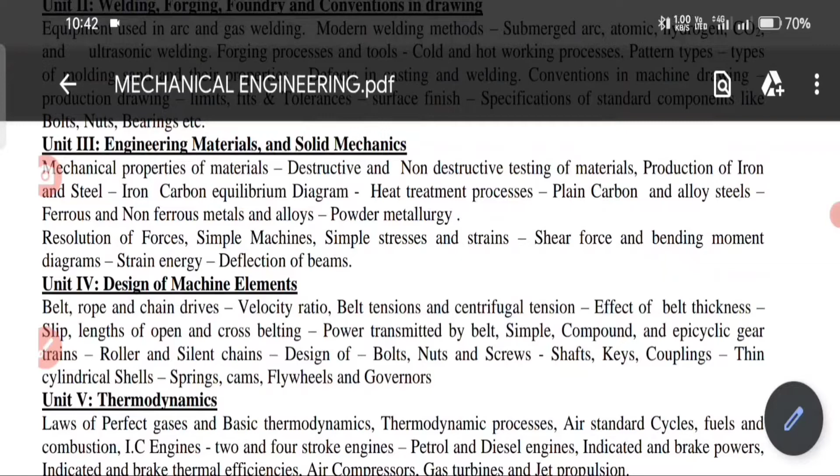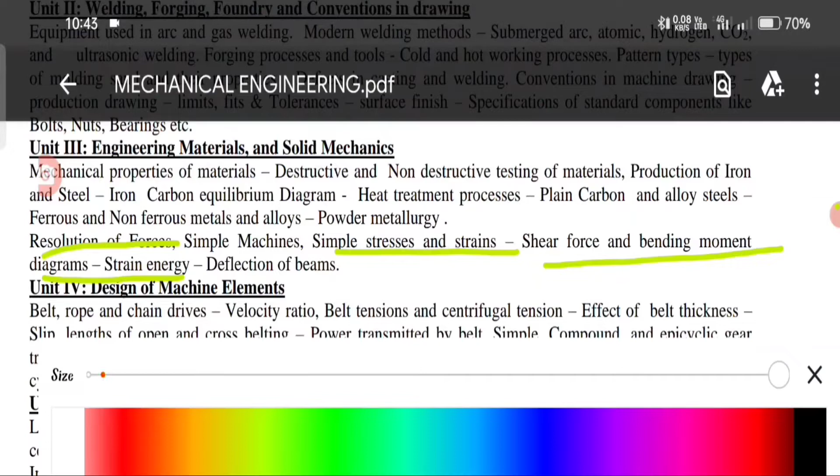మనం కూడా సిలబస్ చూద్దాం, ఏ టాపిక్స్ కవర్ అయ్యానో చెప్తాను. రెజల్యూషన్ ఆఫ్ ఫోర్సెస్, సింపుల్ స్ట్రెస్సెస్ అండ్ స్ట్రెయిన్స్, షియర్ ఫోర్స్ అండ్ బెండింగ్ మూమెంట్ డయాగ్రామ్స్, స్ట్రెయిన్ ఎనర్జీ వరకు మనం అన్నీ కవర్ చేసాం. డిఫ్లెక్షన్ ఆఫ్ బీమ్స్ అనేది నెక్స్ట్ క్లాస్లో చూస్తాం, అలాగే సింపుల్ మిషన్స్ కూడా కవర్ చేస్తాం. సో ఆల్మోస్ట్ 80% సిలబస్ పార్ట్ 1 వీడియోలో కవర్ చేసాం. ఎవరైనా చూడనట్లయితే మెకానికల్ స్టూడెంట్స్ ఫస్ట్ వీడియో డిస్క్రిప్షన్లో లింక్ ఉంది, వెళ్ళి చూడండి.

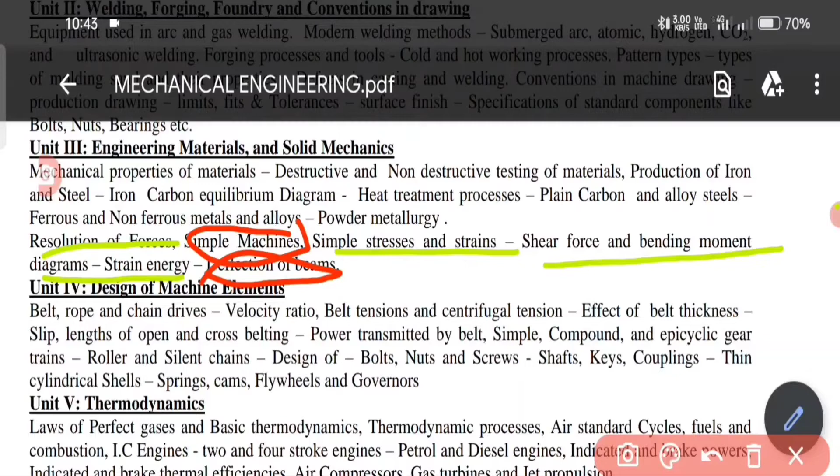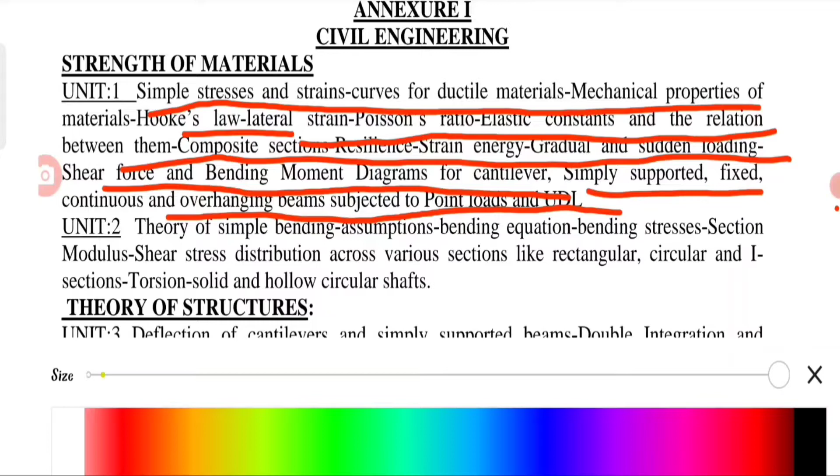ఓకే, సివిల్ ఇంజనీరింగ్కి సంబంధించి ఈసెట్ సిలబస్ స్ట్రెంగ్త్ ఆఫ్ మెటీరియల్స్ చూద్దాం. మనము ఫస్ట్ వీడియోలో ఏదైతే కవర్ చేస్తున్నామో ఇప్పుడు చూద్దాం: సింపుల్ స్ట్రెస్సెస్ అండ్ స్ట్రెయిన్స్, కర్వ్స్ ఫర్ డక్టైల్ మెటీరియల్స్, మెకానికల్ ప్రాపర్టీస్ ఆఫ్ మెటీరియల్స్, హుక్స్ లా, lateral strain, Poisson's ratio, elastic constants and the relation between them, composite sections, resilience, strain energy, gradual and sudden loading, shear force and bending moment diagrams for cantilever, simply supported, fixed, continuous overhanging beams, subject to point load and UDL. సో ఇవన్నీ కంప్లీట్ అయిపోయాయి, సిలబస్ అంతా కంప్లీట్ అయిపోయింది. సో ఇది యూనిట్ 1 కంప్లీటెడ్.

నెక్స్ట్ ఈ వీడియోలో రిమైనింగ్ టాపిక్స్ ఏవైతే ఉన్నాయో అవి ఇప్పుడు చెప్తాం. థియరీ ఆఫ్ సింపుల్ బెండింగ్, అజంప్షన్స్, బెండింగ్ ఈక్వేషన్, బెండింగ్ స్ట్రెసెస్, సెక్షన్ మాడ్యులస్, షియర్ స్ట్రెస్ డిస్ట్రిబ్యూషన్ అక్రాస్ ది వేరియస్ సెక్షన్స్, రెక్టాంగులర్, సర్క్యులర్స్ అండ్ సాలిడ్ అండ్ హాలో సర్క్యులర్ షాఫ్ట్స్.

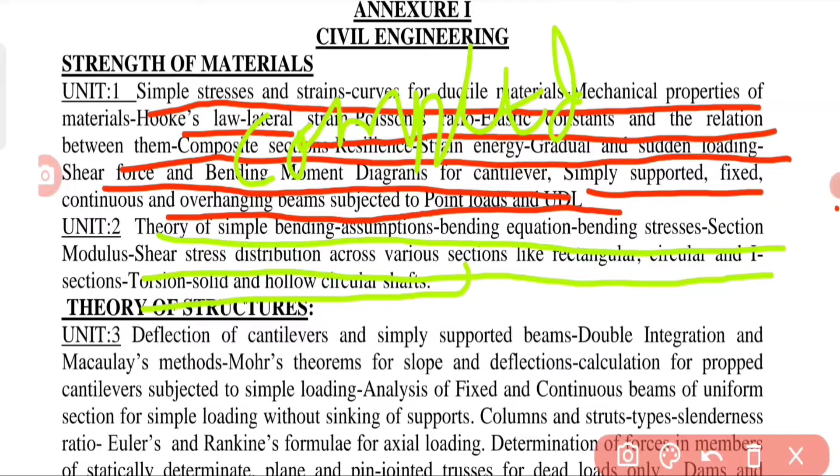సో ఈ వీడియోలో మనం ఇవన్నీ కవర్ చేస్తాం. ఆ తర్వాత వచ్చే నెక్స్ట్ వీడియోలో థియరీ ఆఫ్ స్ట్రక్చర్స్ కంప్లీట్ సిలబస్ వస్తుంది. సో ఇప్పుడు యూనిట్ 2కి సంబంధించి సిలబస్ స్టార్ట్ చేద్దాం. ఈ వీడియో రాకేష్ సార్ కంప్లీట్ చేస్తారు. థియరీ ఆఫ్ సింపుల్ బెండింగ్ అనే టాపిక్ని చూద్దాం.

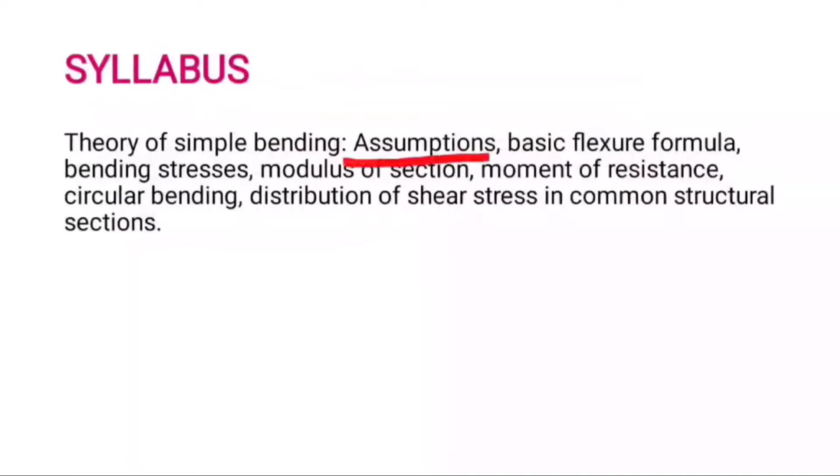ఈరోజు క్లాస్లో మనం డిస్కస్ చేసుకునే సిలబస్ ఏంటంటే అజంప్షన్స్, బేసిక్ ఫ్లెక్చర్ ఫార్ములా, బెండింగ్ స్ట్రెస్సెస్, మాడ్యులస్ ఆఫ్ సెక్షన్, మొమెంట్ ఆఫ్ రెసిస్టెన్స్, సర్క్యులర్ బెండింగ్, డిస్ట్రిబ్యూషన్ ఆఫ్ షియర్ స్ట్రెస్ ఇన్ కామన్ స్ట్రక్చరల్ సెక్షన్స్.

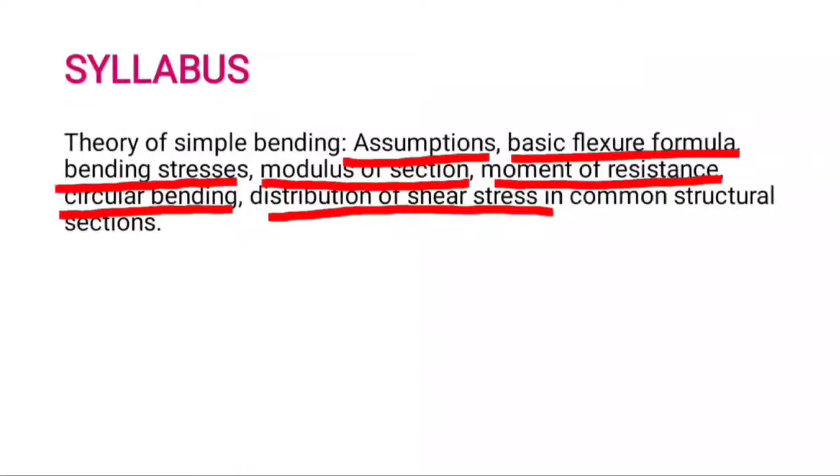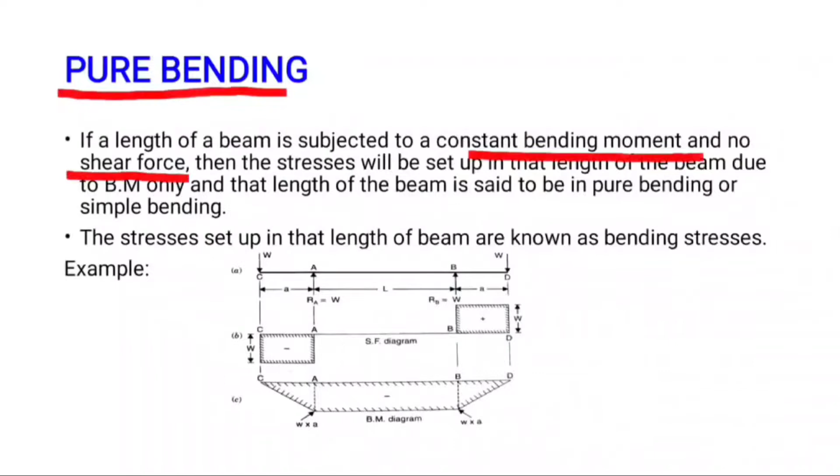అజంప్షన్స్కి వెళ్ళే ముందు ప్యూర్ బెండింగ్ అంటే ఏంటో తెలుసుకుందాం. If a length of beam is subjected to a constant bending moment and no shear force, that is shear force is 0, bending moment is constant, then the stresses will be set up in that length of beam due to bending moment only. ఆ పర్టికులర్ లెంత్ ఆఫ్ బీమ్లో మనకి స్ట్రెస్సెస్ అనేటివి బెండింగ్ మూమెంట్ వల్ల మాత్రమే డెవలప్ అవుతాయి, షియర్ ఫోర్స్ వల్ల డెవలప్ కావు.

ఎందుకంటే ఆ పర్టికులర్ లెంత్ ఆఫ్ బీమ్లో షియర్ ఫోర్స్ అనేది 0. That length of beam is said to be in pure bending or simple bending. స్ట్రెసెస్ అనేటివి బెండింగ్ మూమెంట్ వల్ల మాత్రమే డెవలప్ అవుతున్నాయి కాబట్టి వాటిని బెండింగ్ స్ట్రెసెస్ అని అంటున్నాం. ప్యూర్ బెండింగ్కి ఒక ఎగ్జాంపుల్ తీసుకుందాం, ఒక ఓవర్ హ్యాంగింగ్ బీమ్ తీసుకుందాం. ఓవర్ హ్యాంగింగ్ పార్ట్లో ఎడ్జెస్లో W అనే లోడ్ యాక్ట్ అవుతుంది బోత్ సైడ్స్. ఆ లోడింగ్ కండిషన్కి షియర్ ఫోర్స్ డయాగ్రామ్ అండ్ బెండింగ్ మూమెంట్ డయాగ్రామ్ ప్లాట్ చేసినట్లయితే, in the portion AB the shear force is 0 and for the same loading condition the bending moment is constant. So we say that the portion AB is under pure bending condition or simple bending condition.

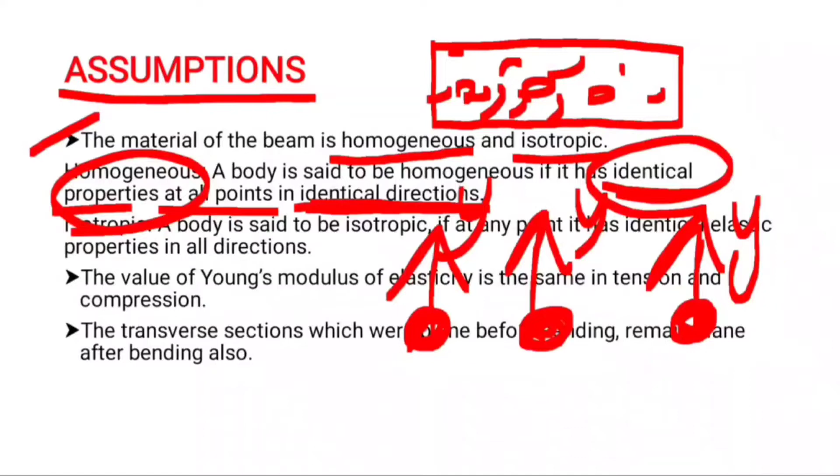When do we call it isotropic? This is a body, it has lots of points. At any point we consider, the elastic properties in all directions, that is x direction, y direction and z direction - if the elastic properties are the same, then the body is said to be isotropic.

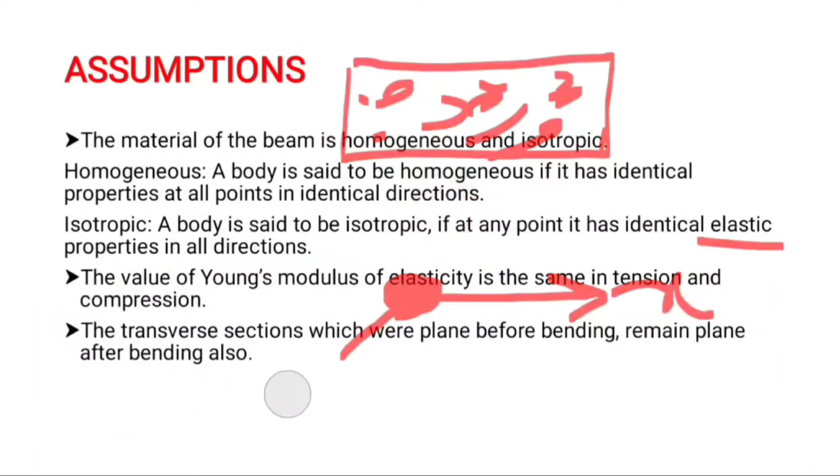The next assumption is the value of Young's modulus of elasticity is same in tension and in compression, that is E tension, Young's modulus of elasticity in tension, is equal to Young's modulus of elasticity in compression.

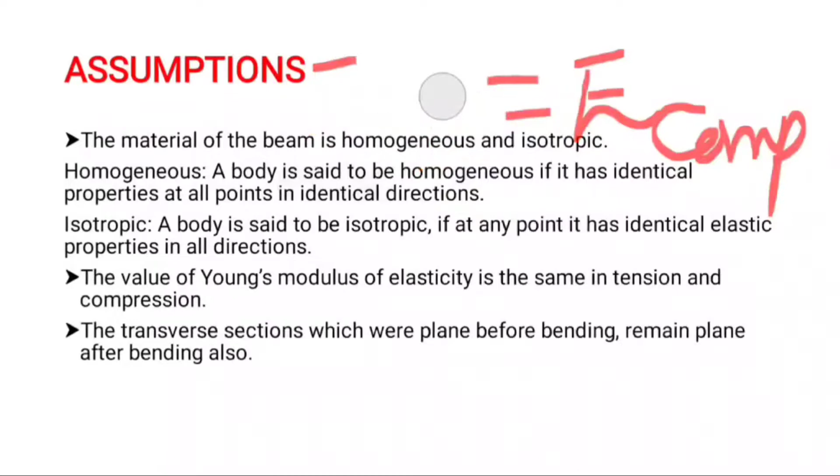The transverse section which were plane before bending remain plane after bending. For the third assumption, for better understanding, we draw a figure. This is the beam before bending condition. This is the transverse section, named as neutral axis. That neutral axis is plane before bending, and remains plane after bending also.

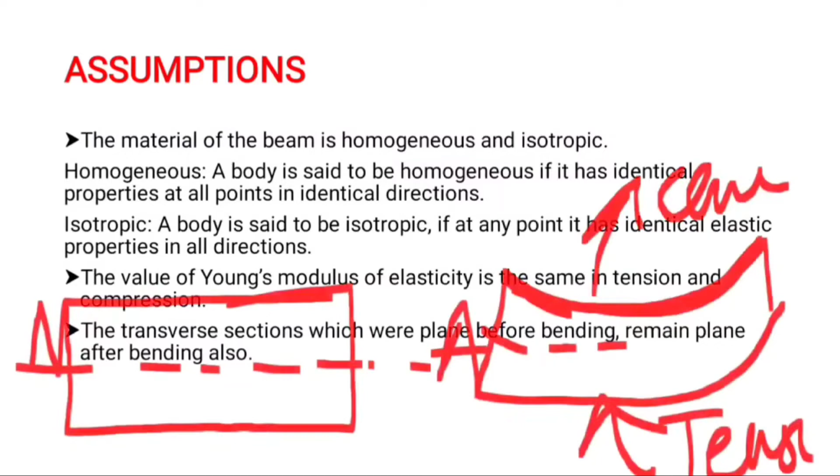This is bending, after bending condition. After bending, the topmost fibers undergo compression, and the bottommost fibers undergo tension, but the neutral axis remains in plane condition only.

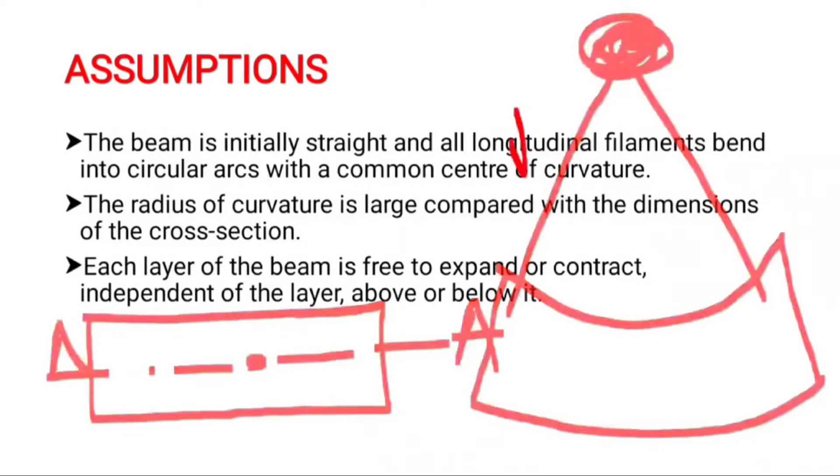The next assumption is the beam is initially straight. This is the neutral axis. All longitudinal filaments bend into circular arcs with a common center of curvature. This is the common center of curvature. The radius will be r. We consider the radius from the neutral axis.

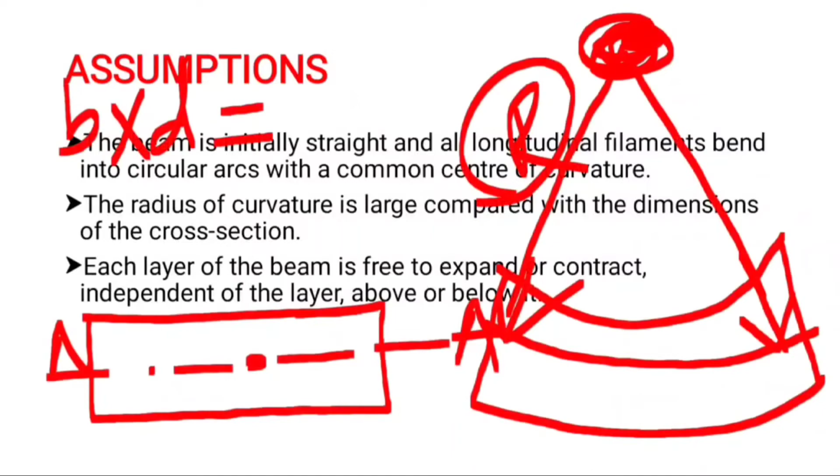The next assumption is the radius of curvature is large compared with the dimensions of the cross section. The beam dimensions, let's say B into D, is equal to 300 mm by 200 mm, but the radius will be 10 meters. Comparing the radius with the dimensions of the beam, the radius is very large.

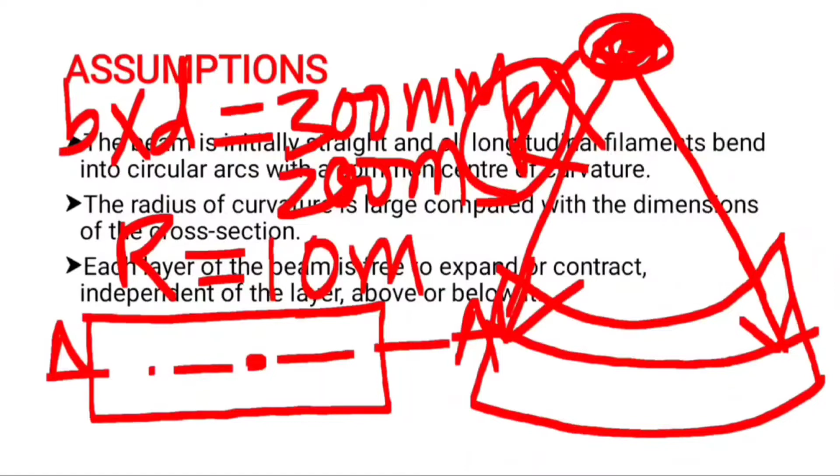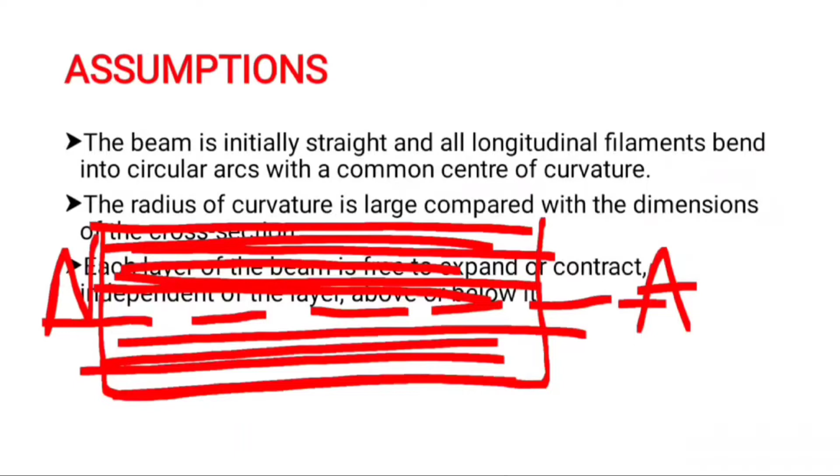That is the assumption made in bending theory. The last assumption is each layer of the beam is free to expand or contract independent of the layer above or below it. Let's say this is a beam, this is a transverse section, that is neutral axis. The layers above the neutral axis and the layers below the neutral axis are free to expand or contract. They do not depend on the other layers - they are independent of the layer above or below it. This is the final assumption made in bending theory.

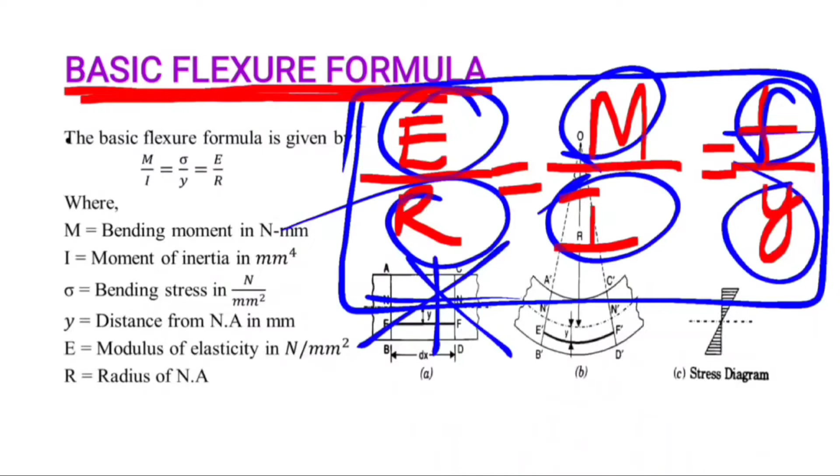Based on this phrase, we remember the formula: Elizabeth Rani, may I follow you. Here the term M is bending moment, I is moment of inertia, sigma is bending stress, y is distance from the neutral axis. We can observe here, this is the strip, this is the neutral axis. From the neutral axis we measure the distance, that is y. E is modulus of elasticity in Newton per mm square, R is radius, this is radius.

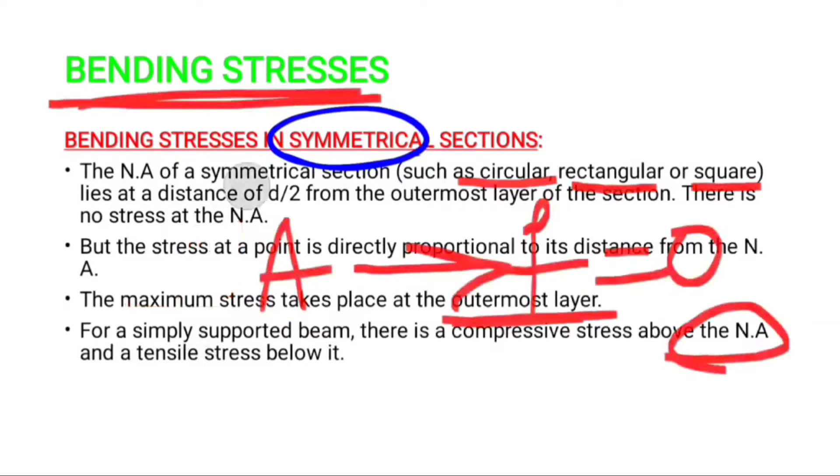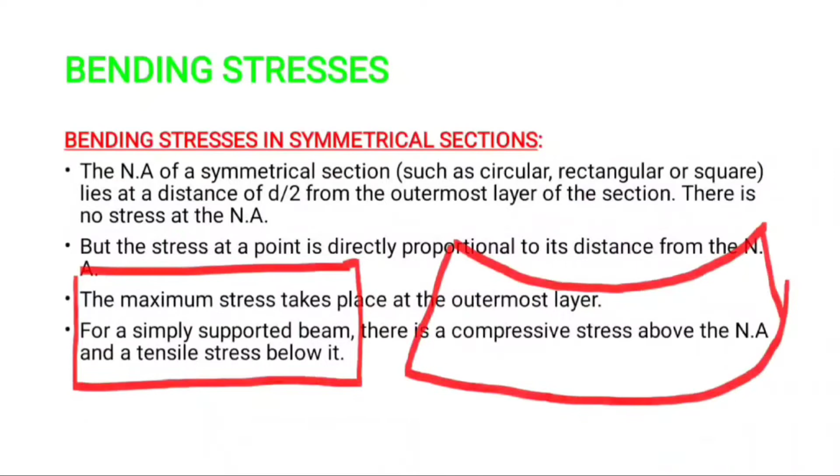For a simply supported beam, there is a compressive stress above the neutral axis and a tensile stress below it. Why? Because we see the bending phenomenon - this is before bending, this is after bending. The topmost fibers undergo compression, the bottommost fibers undergo tension. That's why the compressive stresses are developed at the top and tensile stresses are developed at the bottom.

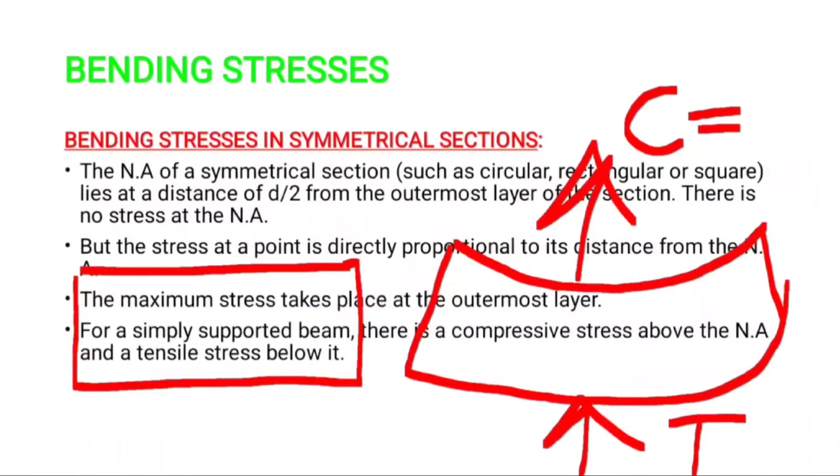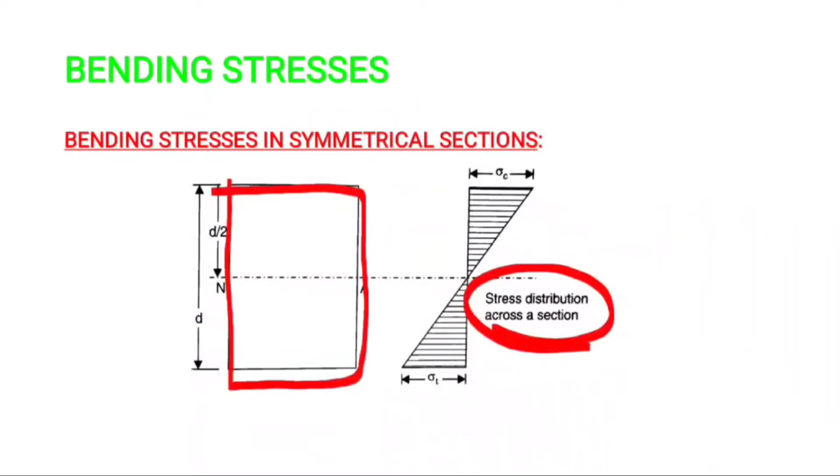Let's see, this is a simply supported beam. We draw the stress distribution. This is compression, this is tension.

Y max అనేది సిమెట్రికల్ సెక్షన్స్లో సేమ్గా ఉంటుంది, బట్ ఇన్ అన్సిమెట్రికల్ సెక్షన్స్ y max అనేది చేంజ్ అవుతుంది, నాట్ కాన్స్టెంట్. For finding the bending stresses in the beam, bigger value of y is used, that means y max.

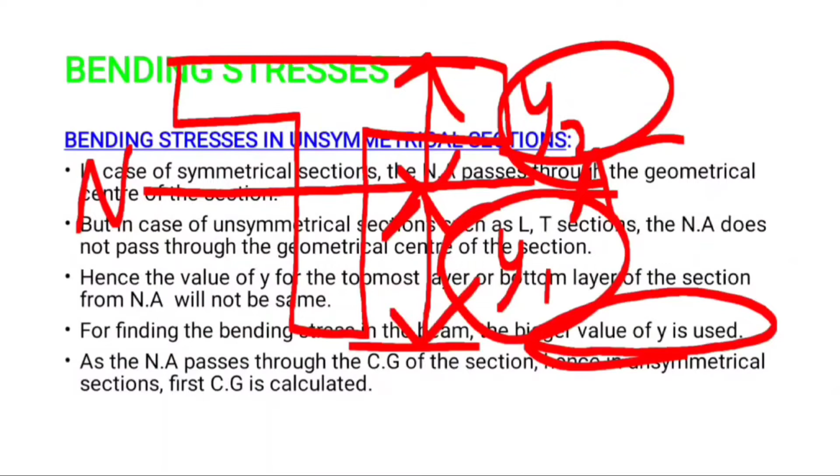We calculate, let's say this is a T section, this is neutral axis. From this y1, this is y2, right? Among these two, y1 or y2, whichever is maximum we consider for finding the bending stresses. y1 y2 కనుక్కుంటాం, ఆ రెండిట్లో ఏది మ్యాక్సిమం ఉంటే ఆ వాల్యూని యూజ్ చేసి బెండింగ్ స్ట్రెస్సెస్ అనేటివి కనుక్కుంటాం అన్సిమెట్రికల్ సెక్షన్స్లో.

అదే సిమెట్రికల్ సెక్షన్స్లో మనకు ఆ ప్రాబ్లం ఏమి ఉండదు, మనం కన్సిడర్ చేసేది y మ్యాక్సిమం, ఎందుకంటే న్యూట్రల్ యాక్సిస్ అనేది d/2 డిస్టెన్స్లో పాస్ అవుతుంది కాబట్టి ఎలాంటి ప్రాబ్లం ఉండదు. d/2 అబౌవ్, d/2 బిలో - d/2 అనేది మనకు y max వాల్యూ వస్తుంది.

As the neutral axis passes through the center of gravity of the section, hence in unsymmetrical sections first CG is calculated. First మనం సెంటర్ ఆఫ్ గ్రావిటీని కనుక్కున్న తర్వాత y వాల్యూని కనుక్కొని then we find the bending stresses.

సెక్షన్ మాడ్యులస్ అంటే ఏంటి చూద్దాం. సెక్షన్ మాడ్యులస్ ఎలా డిఫైన్ చేస్తామంటే, it is the ratio of moment of inertia of a section about a neutral axis to the distance of outermost layer from the neutral axis. It is denoted by the symbol Z.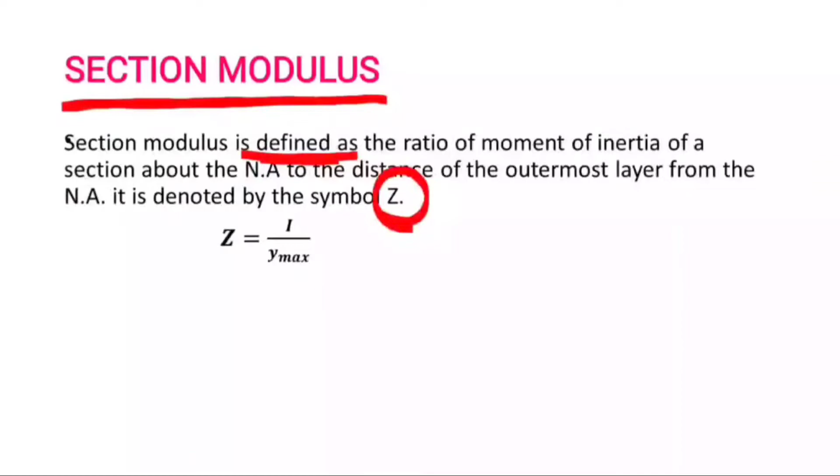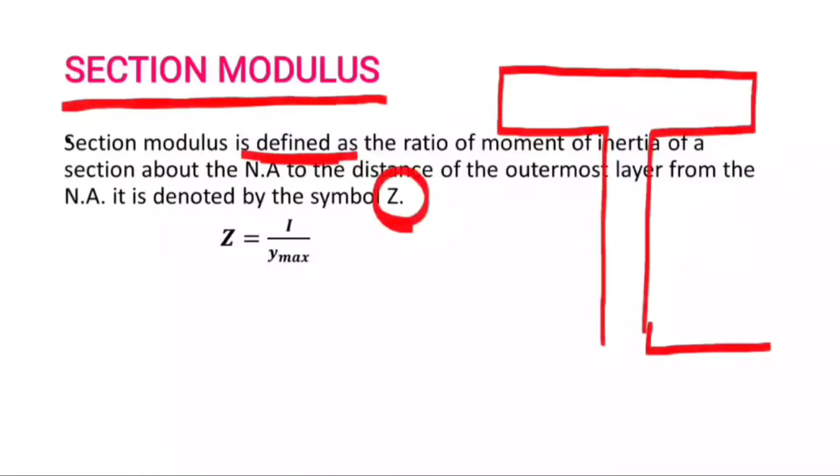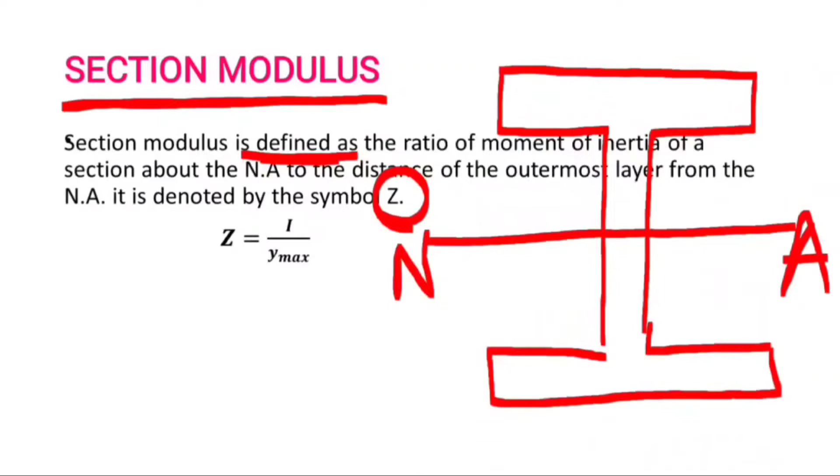It is nothing but, let's say I section తీసుకుందాం. It is a symmetrical I section. For the symmetrical I section, the neutral axis is passing through the center of gravity only. This is d/2. This d/2 is y max. For the I section, first we calculate the moment of inertia.

మనకు moment of inertia ని ఏ విధంగా కనుక్కోవాలో లాస్ట్ క్లాసెస్లో చూసాం, మనకు తెలుసు. y max అనేది d/2. మనం z కనుక్కోవాలంటే I/y max వేస్తే సెక్షన్ మాడ్యులస్ వాల్యూ వస్తుంది.

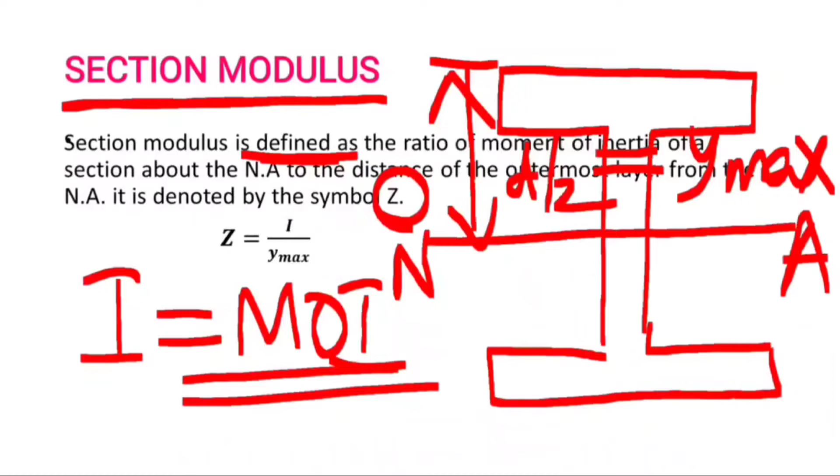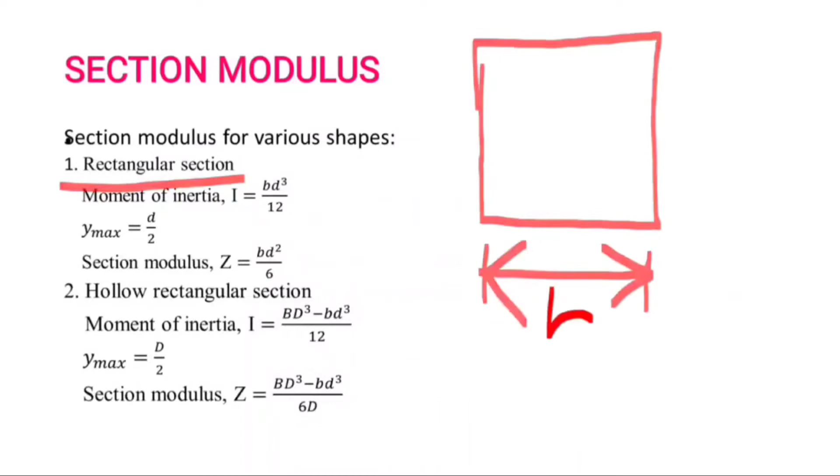సెక్షన్ మాడ్యులస్ అనేది కొన్ని సెక్షన్స్కి ఏ విధంగా చేంజ్ అవుతుందో చూద్దాం. ఫస్ట్ రెక్టాంగులర్ సెక్షన్కి - ఇది b, బ్రెడ్త్ b, డెప్త్ d. మొమెంట్ ఆఫ్ ఇనర్షియా కనుక్కునేటప్పుడు రెక్టాంగులర్ సెక్షన్కి ఫార్ములా bd క్యూబ్ బై 12 అని చెప్పుకున్నాం. వైమాక్స్ వచ్చేసి d/2. సో bd క్యూబ్ బై 12 డివైడెడ్ బై d/2, we get bd square by 6. This is the section modulus for rectangular section.

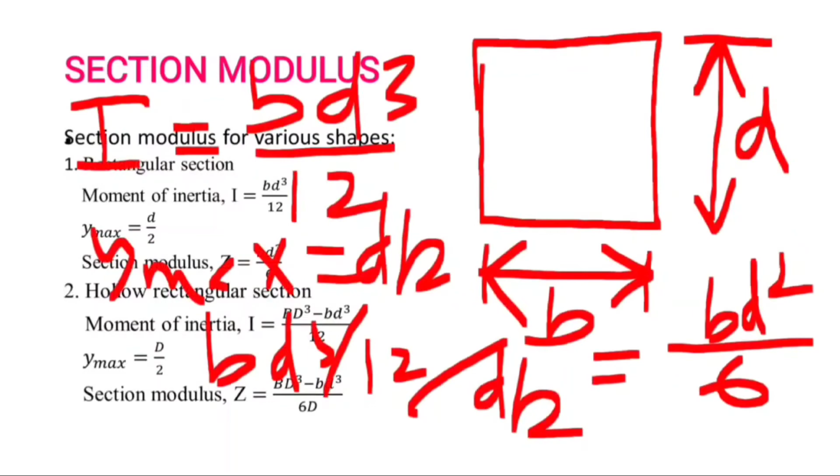Similarly, for hollow rectangular section, we calculate section modulus. I value will be BD cube minus bd cube by 12 - this is capital, let's say this is hollow. Outermost dimensions are capital B, capital D. This value will be small b, small d. We did not consider the hollow portion, we consider only the solid portion. That's why moment of inertia we calculated for the solid portion, removing the hollow portion. Moment of inertia will be BD cube minus small bd cube divided by 12. Ymax will be capital D/2. Section modulus will be I by Ymax. We get BD cube minus small bd cube divided by 6 capital D, which is the section modulus for hollow rectangular section.

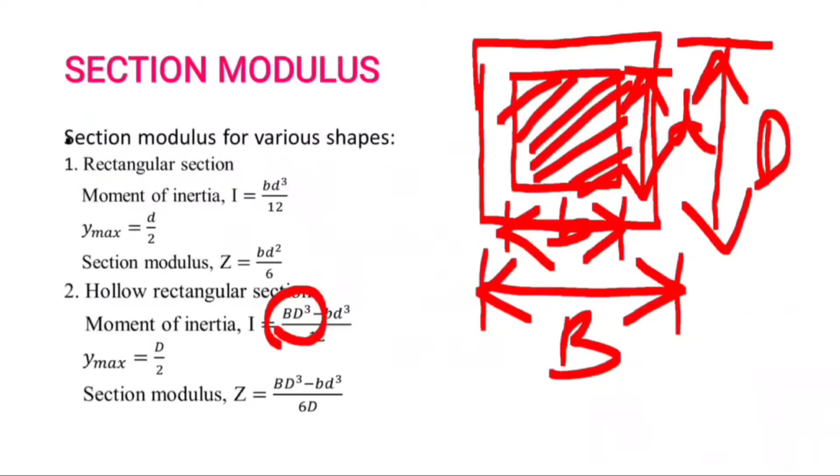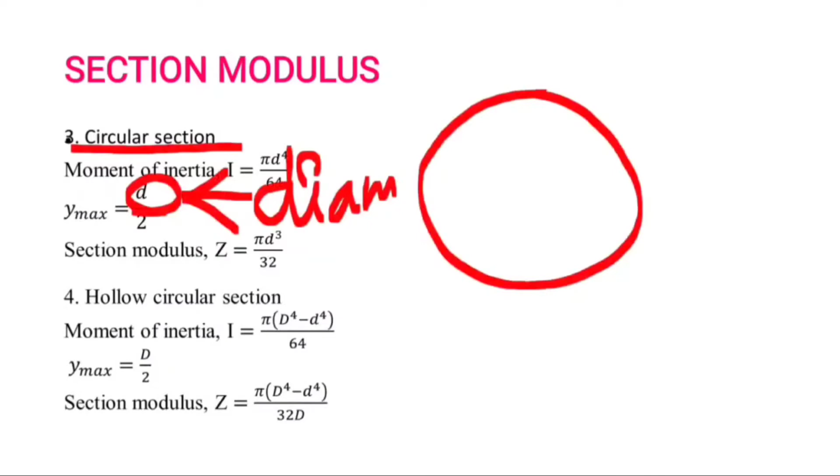Next we see the circular section. In the rectangular section, D refers to the depth. In this case, D refers to the diameter. For the circular section, D is the diameter of the circle.

The moment of inertia is equals to pi d power 4 by 64. Ymax will be d/2. Section modulus Z is equals to I by Ymax, that is equals to pi d power 4 divided by 64 divided by d/2. We get pi d cube by 32 as the section modulus Z value for the circular section.

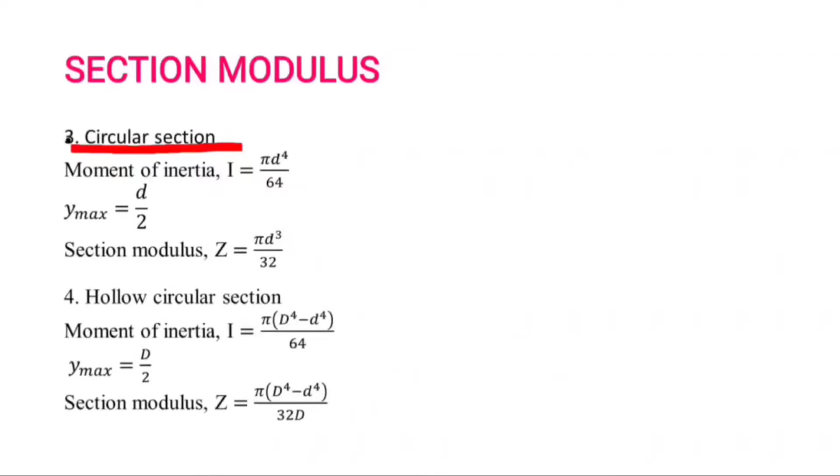In case of hollow circular section, in the same manner as hollow rectangular section, we calculate the hollow circular section also. This is the circle, this is another circle. This diameter will be small d, this diameter will be capital D.

The moment of inertia will be pi times capital D power 4 minus small d power 4 divided by 64. Ymax will be the large diameter, capital D, divided by 2. The section modulus will be Z is equals to I by Ymax. We get pi times D power 4 minus small d power 4 divided by 32D.

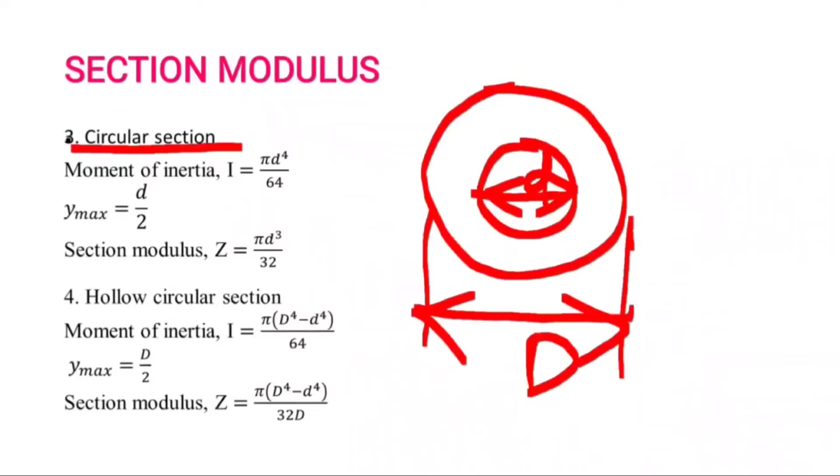Next we see strength of a section. Strength of section is nothing but moment of inertia, moment of resistance. Moment of resistance offered by the section. The moment of resistance is given by,

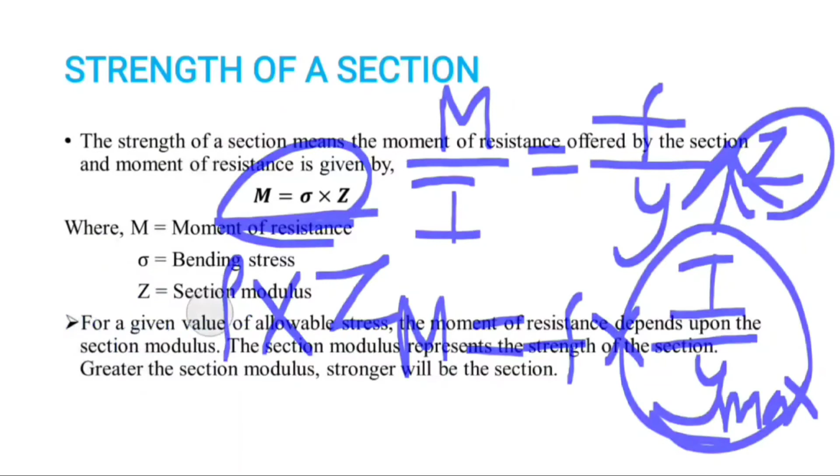we have the equation m by I is equals to f by y. So m is equals to f into I by y. If y is maximum, then it is called as section modulus. Then the moment of resistance is given by bending stress times section modulus. This is the formula, where m is moment of resistance, sigma or f is bending stress, z is section modulus.

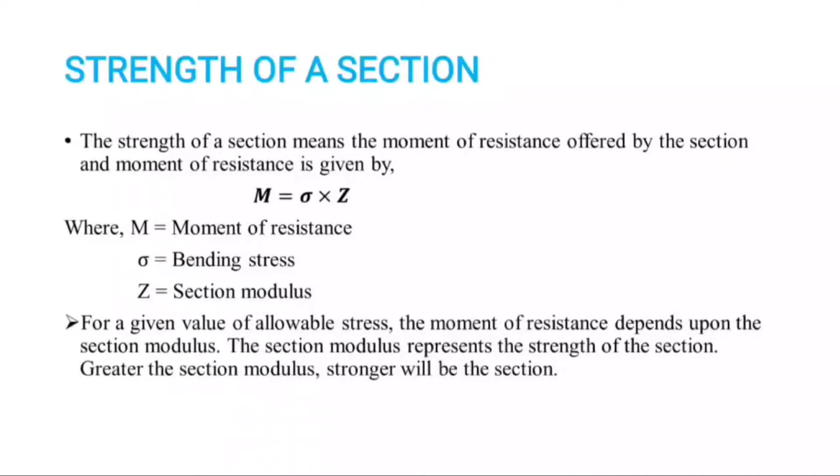For a given value of allowable stress, the moment of resistance depends on the section modulus. The section modulus represents the strength of section. Greater the section modulus, stronger will be the section. This is directly proportional, so if Z is more, the strength, that is moment of resistance, is more.

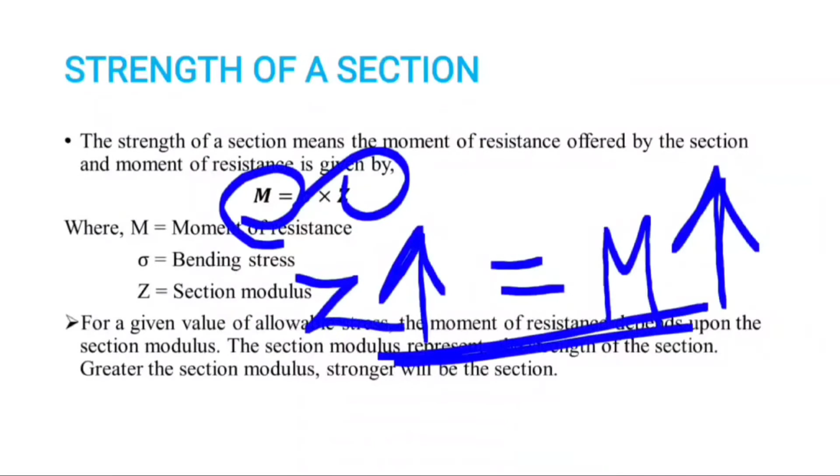Next we see shear stress. Shear stress produced in a beam which is subjected to shear force is known as the shear stresses.

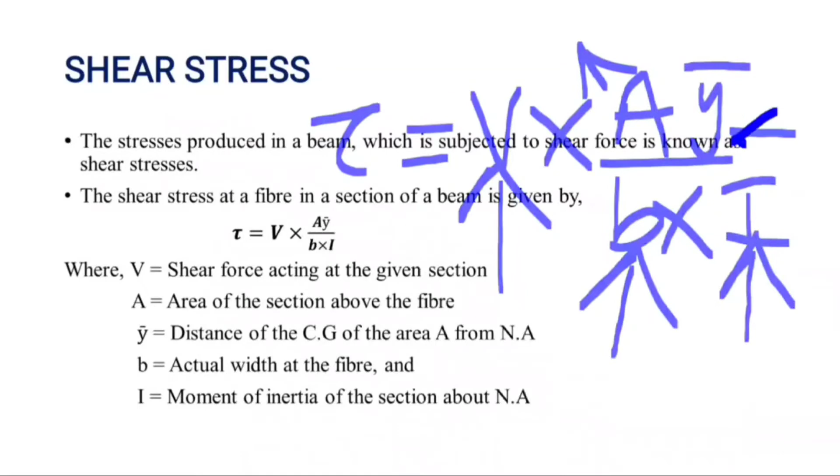The general formula for shear stress, tau is equals to V into A y bar divided by B into I. Here B is actual width of the fiber, I is moment of inertia, A is area of the section above the fiber, V is shear force, y bar is distance of the center of gravity of the area.

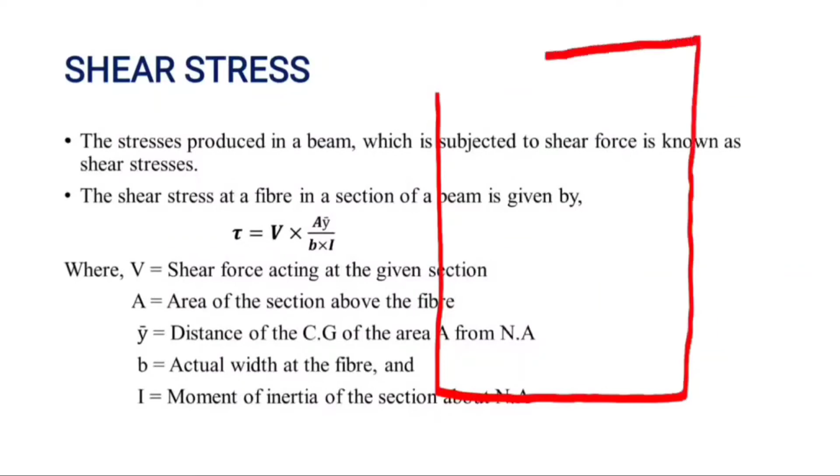Let's say this is a rectangular section. Okay, this is the center of gravity. I consider this portion, that portion I consider, then the area of the section above the fiber, this is the area we consider. Y bar is nothing but, from this portion the centroid is acting. From this center of gravity to the hatched area center of gravity, we calculate y bar. This is the y bar.

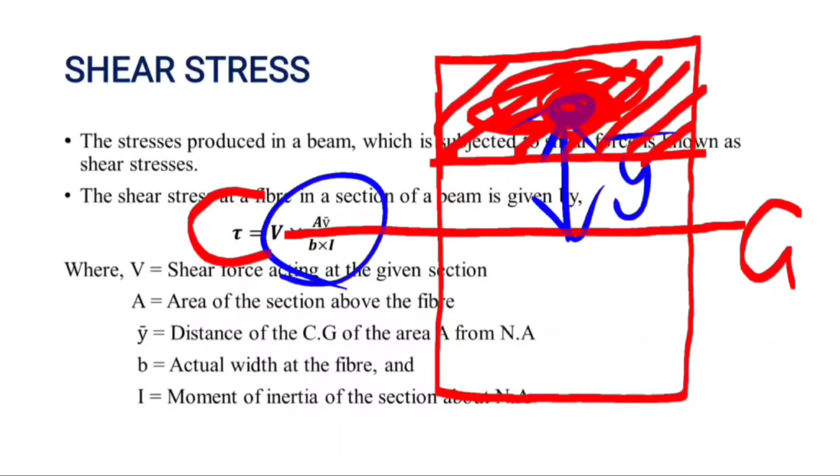This is the basic formula for shear stress. We see some common sections. First we see the shear stress distribution for a rectangular section.

For the rectangular section, the shear stress will be parabolic. This is a parabola, and the shear stress formula is given by tau is equals to V by 2I, d square by 4 minus y square. This is the formula for the rectangular section.

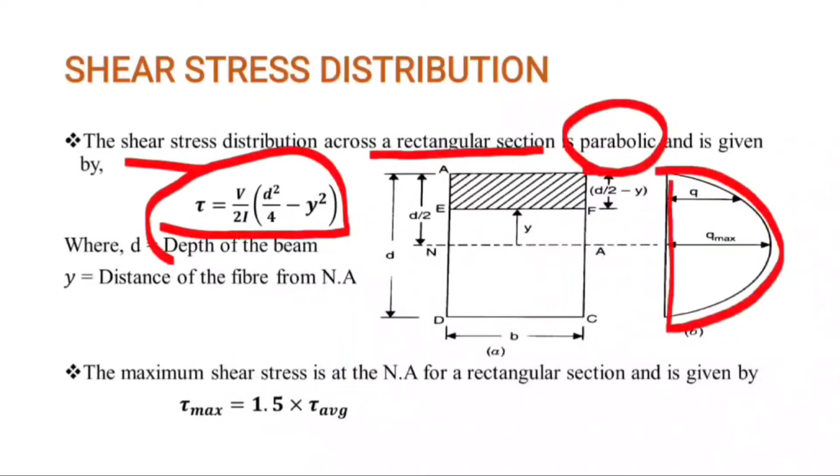The basic formula is tau is equals to V into A y bar by B into I. From that formula we derived the formula for rectangular sections. D is the depth of the beam, and y is the distance of the fiber from the neutral axis

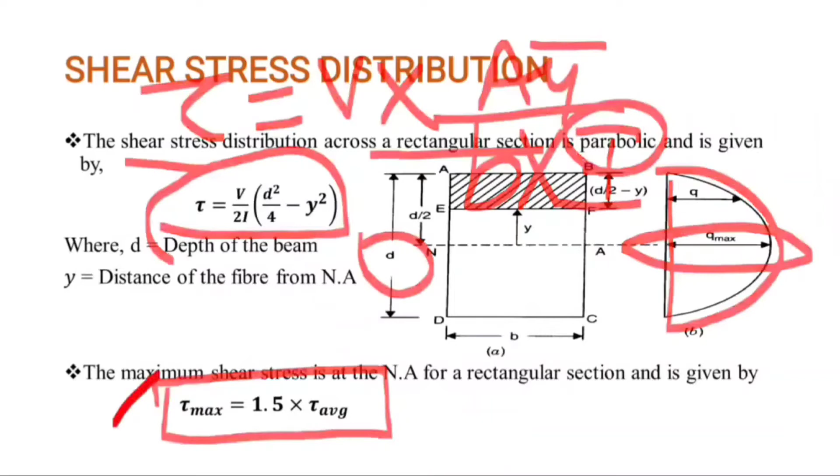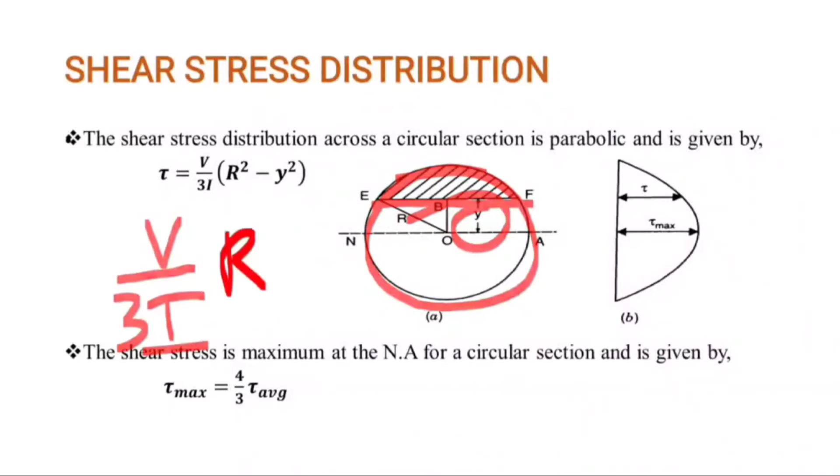If you see for the circular section, this is a circle. I consider a strip, that is EF, a section EF. This is Y. The formula for shear stress is V by 3I, capital R square minus y square. Capital R is nothing but the radius of the circle, y is the distance from the neutral axis.

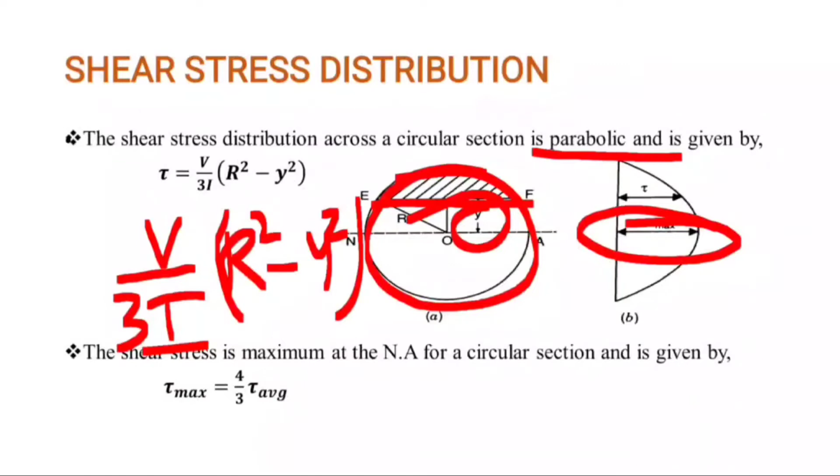The distribution will be parabolic. For a circular section, the distribution is parabola only, with the maximum at the neutral axis. For this case, the maximum shear stress is given by tau max equals 4 by 3 of tau average. That is, maximum shear stress is 4 by 3 times the average shear stress.

The next one is for the I section. We see this is the I section. For the I section, the distribution is parabola only, but at the junctions of web and flange, the shear stress changes abruptly.

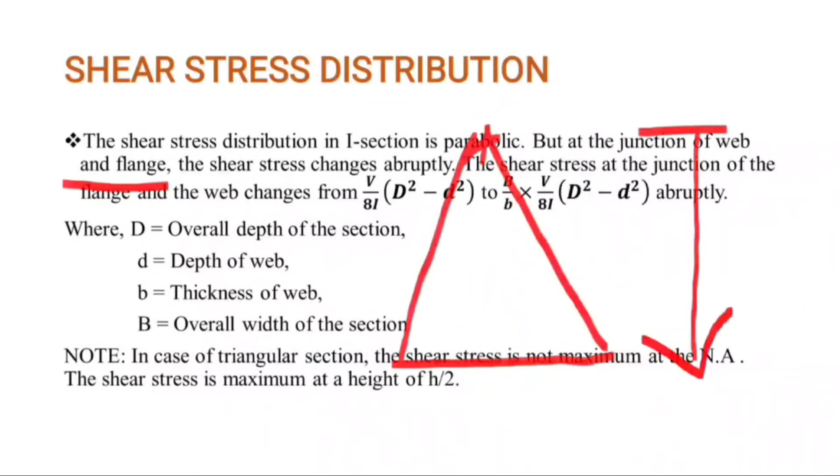But we see the centroid will be at h by 3 distance from the base, or 2/3 of h from the apex point.

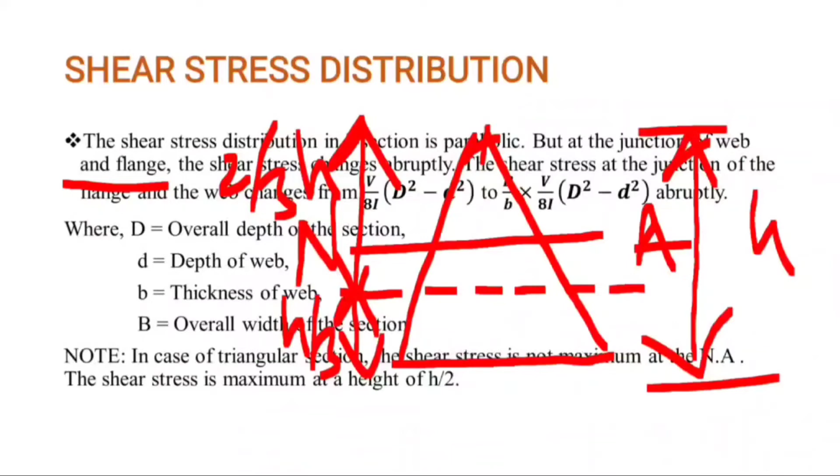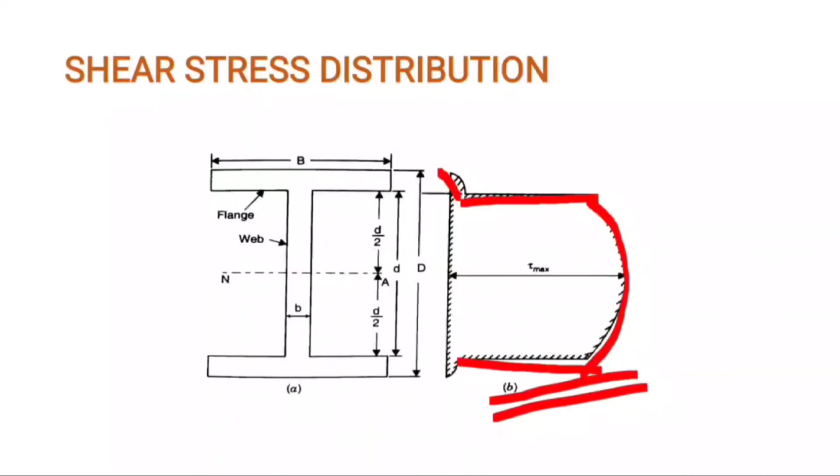This is the shear stress distribution in I sections. At the flange and web junctions, the shear stress changes abruptly. I hope this class is helpful for your preparation.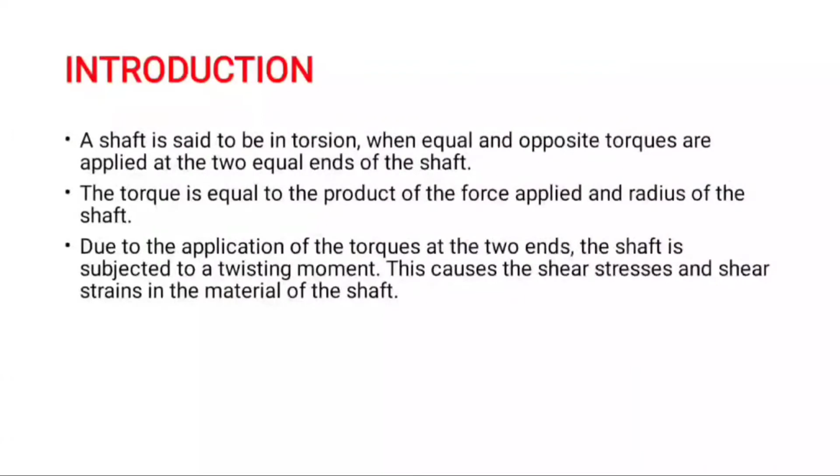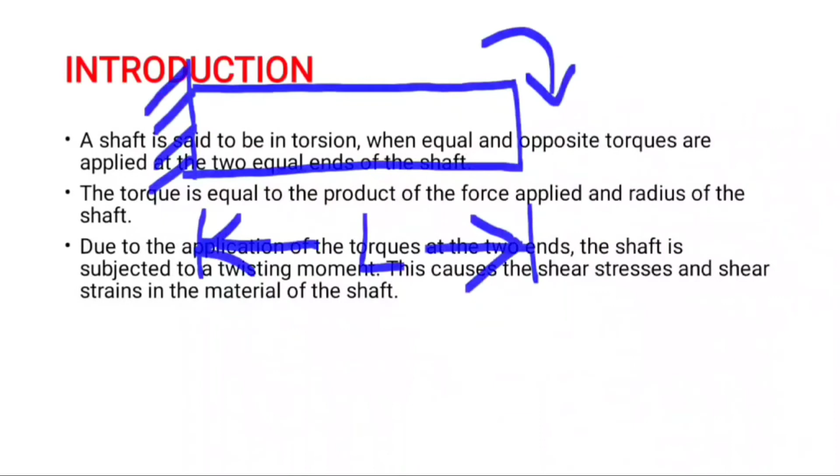A shaft is said to be in torsion when equal and opposite torques are applied at the two equal ends of the shaft. Let's say this is a shaft. This is the length of the shaft.

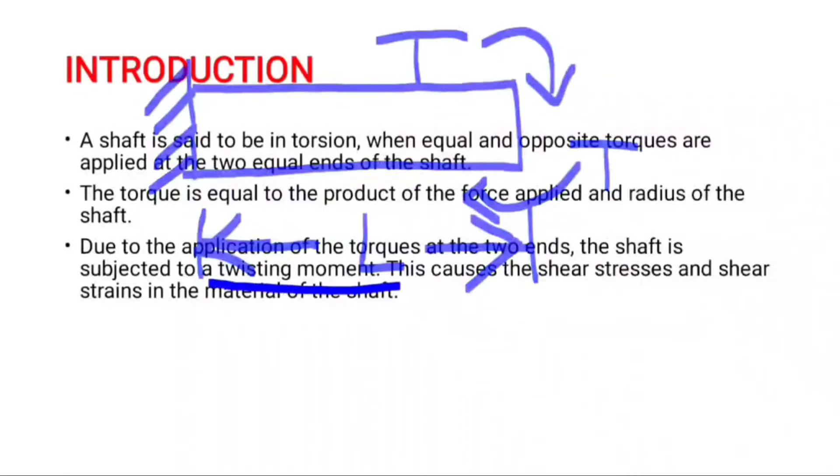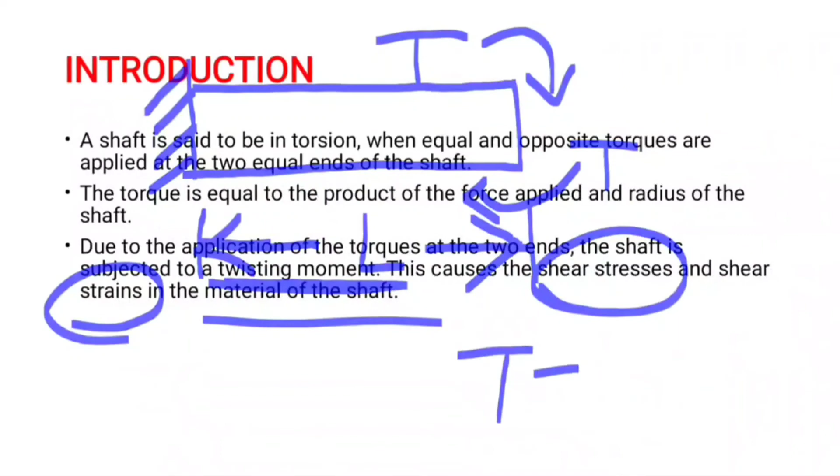At the two equal ends, the torque is applied like this. Due to the application of torque at the two ends, the shaft is subjected to twisting moment. This causes shear stresses and shear strains in the material of the shaft. What is meant by torque? Torque is nothing but the product of a force applied into the radius.

If you observe the shaft from this direction, it seems to be a circle. From the circle, we find a radius easily. It is the center, and this is called radius R. That radius is multiplied with the force applied, and we get the torque value.

Due to the torque, the shaft is subjected to twisting moment due to the torque application. This causes shear stresses and shear strains in the material of the shaft. A twisting moment generates shear stresses and shear strains in that shaft.

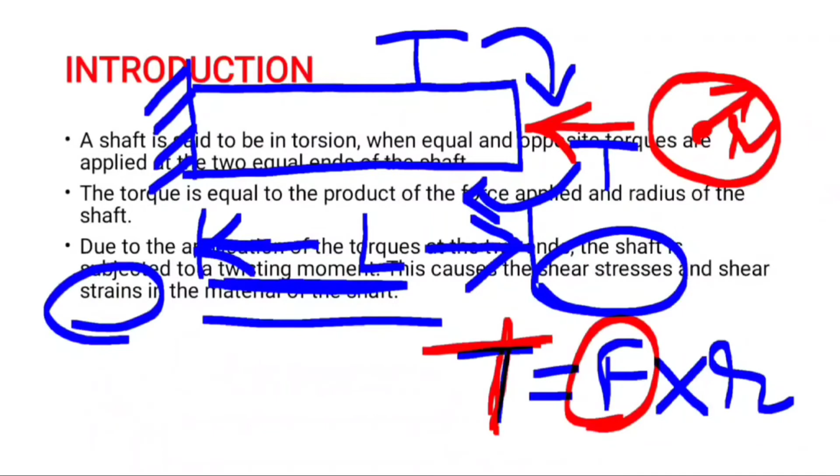Next we move to the assumptions. This is the derivation of the shear stress produced in a circular shaft subjected to torsion, the derivation we do for the formula for torsion. Some basic assumptions are made while doing the derivation. The first one is that the material of the shaft is uniform throughout.

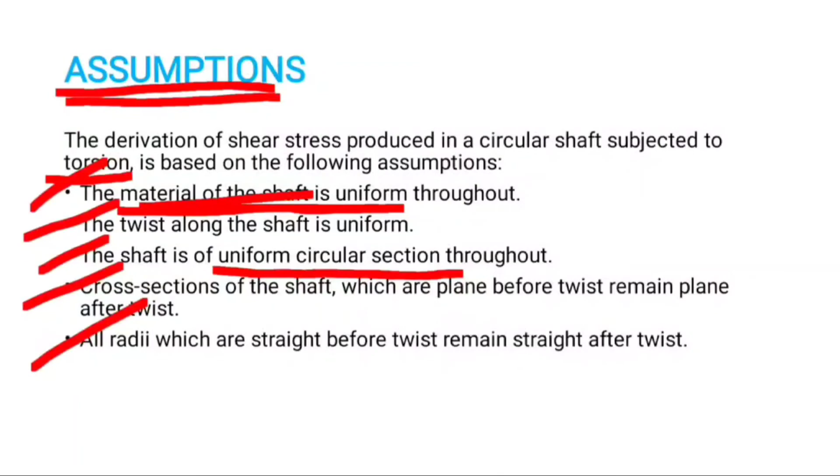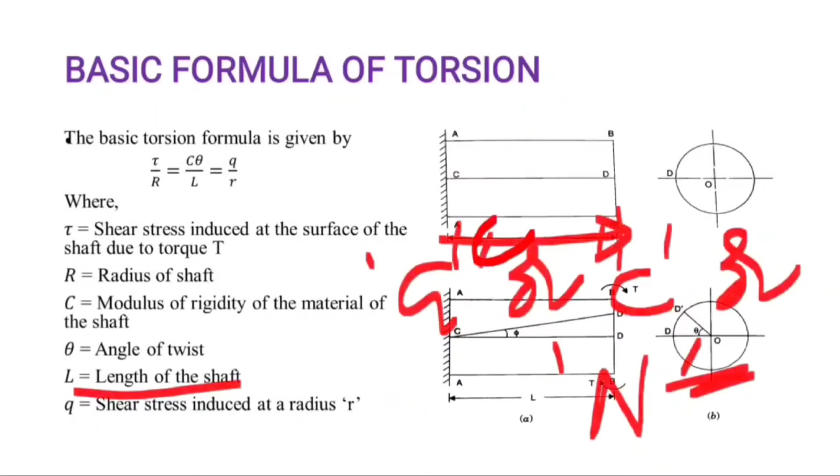Theta is the angle of twist, as we can see from this diagram, and L is the length of the shaft. Small q is the shear stress induced at a small radius r. If capital R, the shear stress induced is tau.

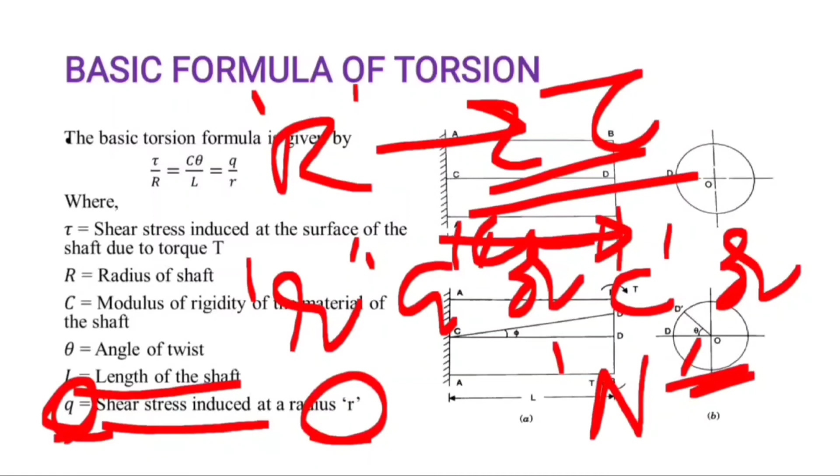Next we move to power transmission by shafts of uniform circular section. If we know the torque expression, we can find the power transmission. The actual formula for power transmission is power equals 2 pi n T divided by 60.

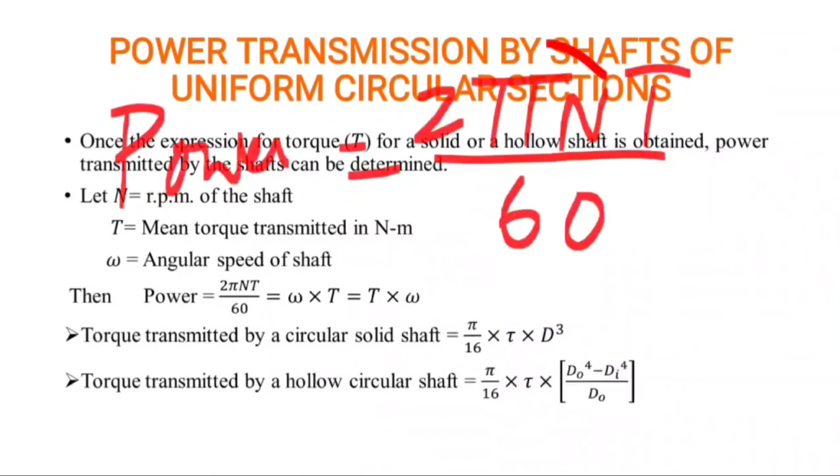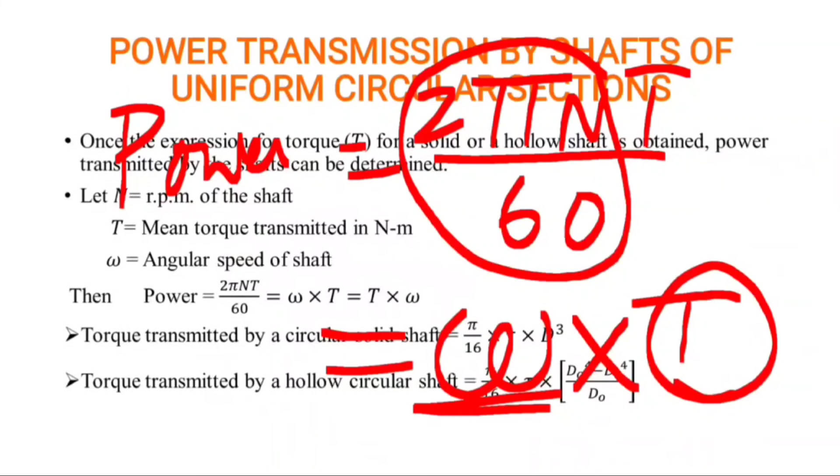This 2 pi n T divided by 60 is omega into T. This T is the mean torque transmitted in Newton meter. Omega is the angular speed of the shaft. N is the rotation per minute of the shaft, RPM of the shaft. This is the basic power formula.

But in this, omega I find by using 2 pi n by 60, but T is not known to me. For the different sections it may change. So we have to calculate for uniform circular sections, isn't it?

For the uniform circular sections, we have two types: one is solid and another one is hollow.

For the solid case, the torque transmitted by a circular solid shaft is given by pi by 16 into tau into d cube. But we have to calculate the power transmission. So power P equals pi by 16 into tau into d cube, this T value multiplied by omega. Omega value will be 2 pi n by 60.

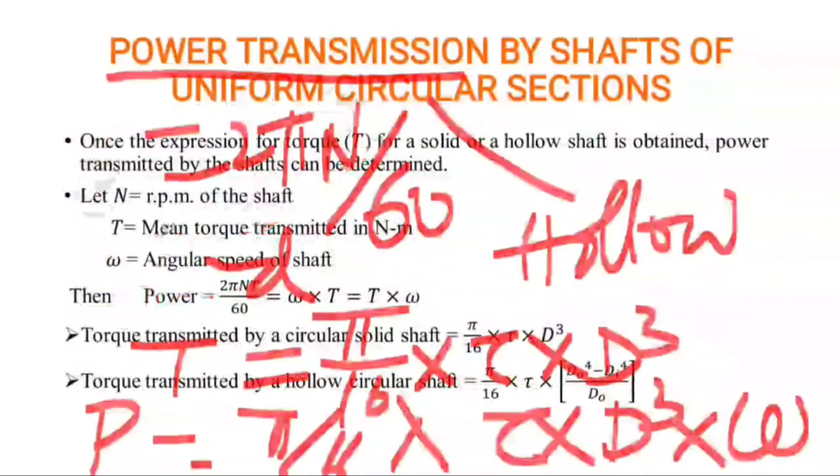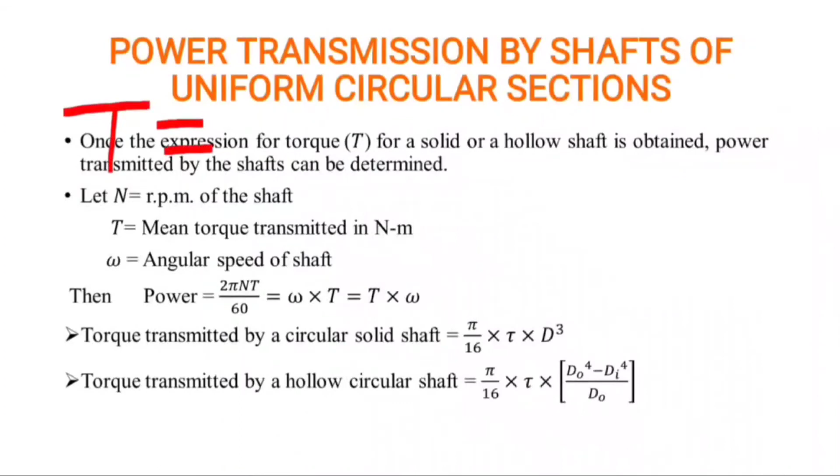The next case is the torque transmitted by a hollow circular shaft. For the hollow case, the torque value will be pi by 16 into tau into d naught power 4 minus d i power 4, divided by d naught. This is the formula for torque.

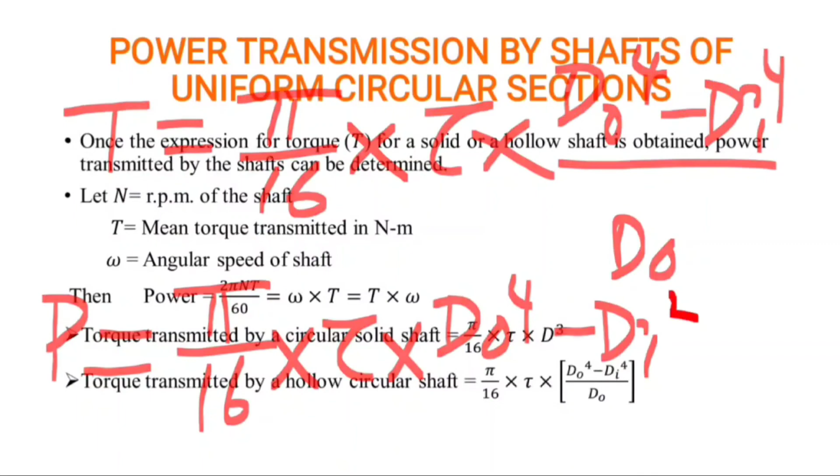But I need power transmission. So power transmission equals pi by 16 into tau into d naught power 4 minus d i power 4, divided by d naught, into omega. Omega will be 2 pi n by 60.